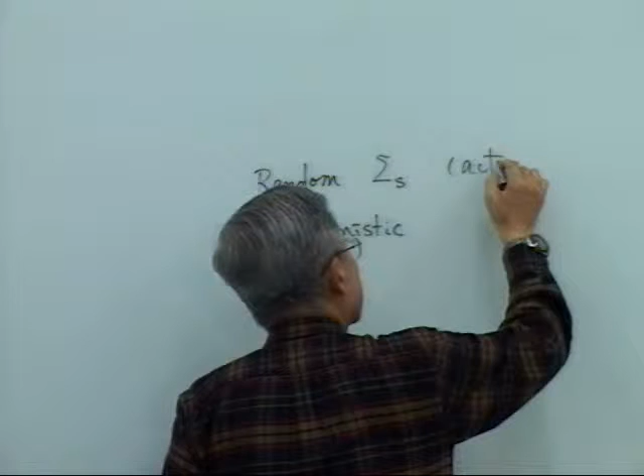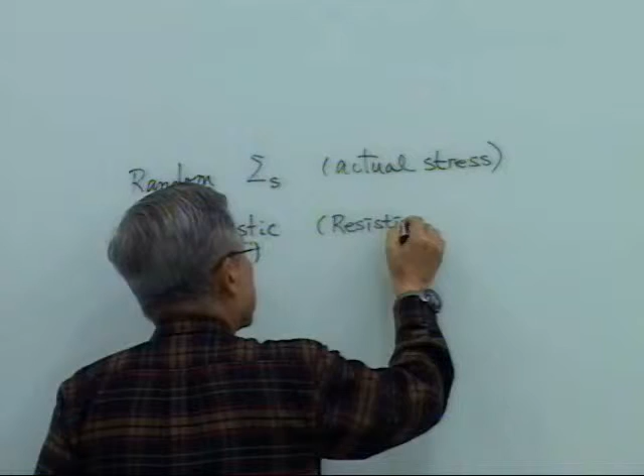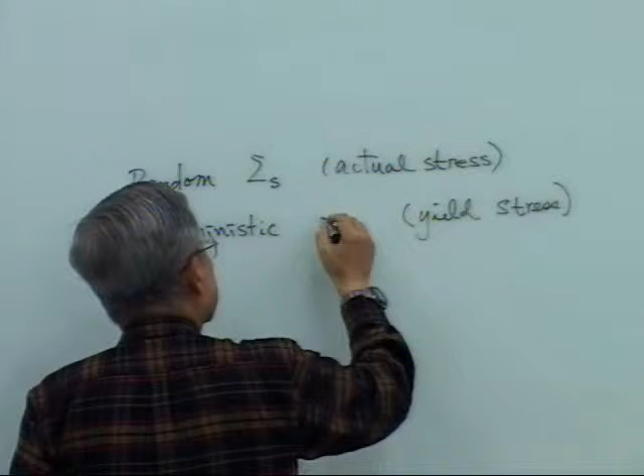So deterministic is we use yield. This is actual stress - unit has to be same. If you use input as a stress, output, let's say strength has to be in stresses. So this is the resisting - I use resisting, I use yield, right? Yield the stress. Yeah, so yield stress deterministic, so I use sigma y.

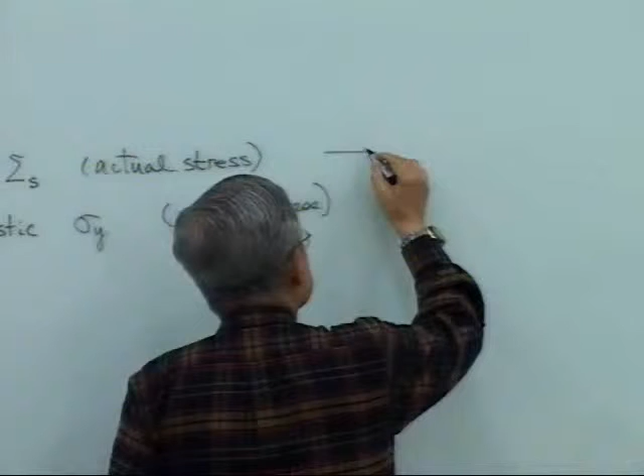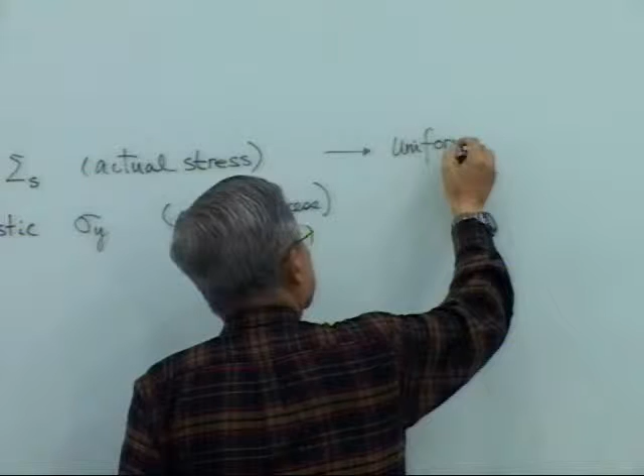So now first the thing we have to do is to get the reliability computation, then you have to cast into probabilistic. Then it's deterministic, this is random. The first case was uniform probability model.

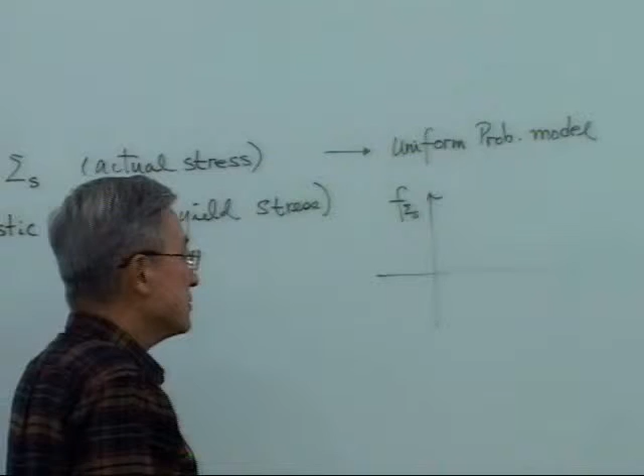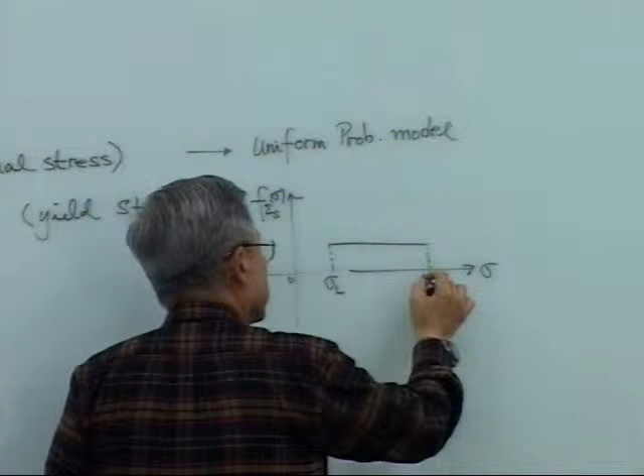So when you draw the function, fs, f sigma s, I use sigma, capital sigma as a random variable. So this could be sigma like this, sigma. Then the uniform probability density function is like this, right? Uniform probability density function. So I use, let's say, this is lower limit, this is upper limit.

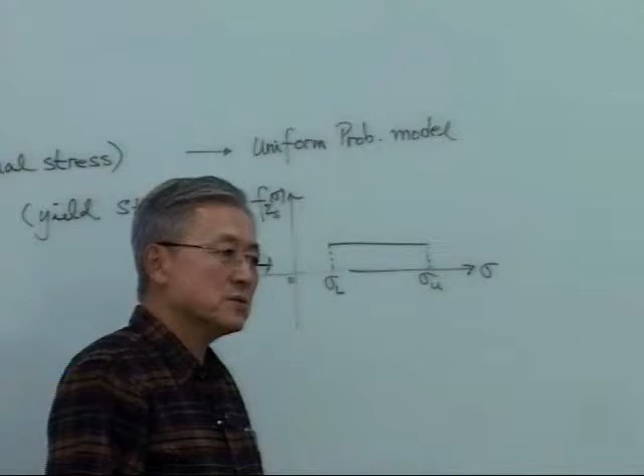This is kind of the simplest probability model used quite often. And this area has to be equal to 1. Then this height is supposed to be what? 1 over sigma u minus sigma L. That's what we did.

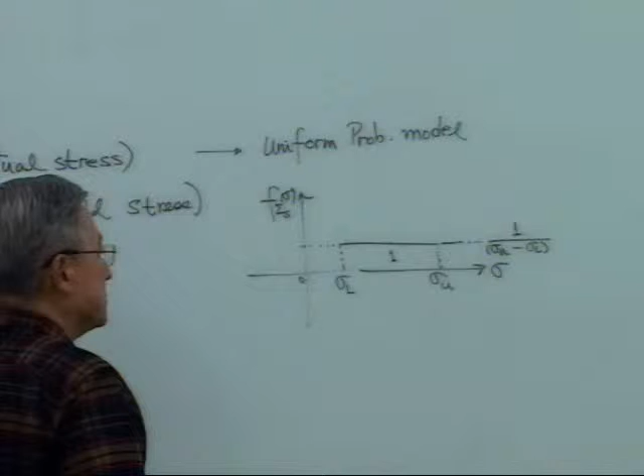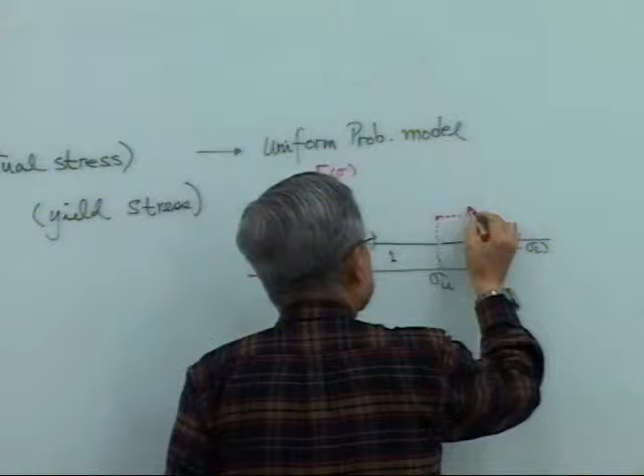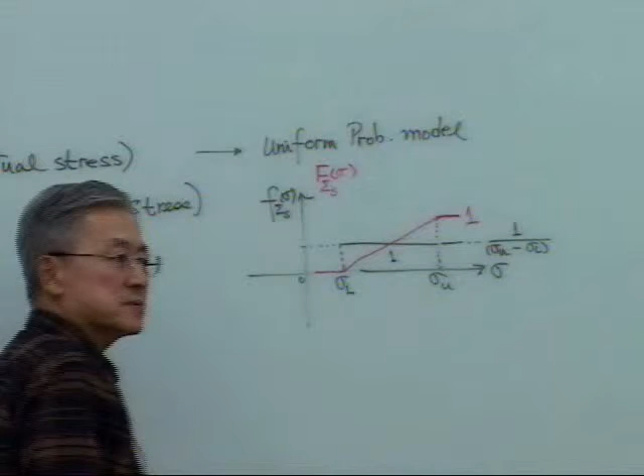And cumulative probability distribution function, or simply distribution function, let's say this is F sigma s. Before it gets to sigma L, of course, is 0. Then right here, cumulative value is equal to 1. Between is like this, right? So it's gonna be like that. That's what we have done - cumulative distribution function for the uniform situation.

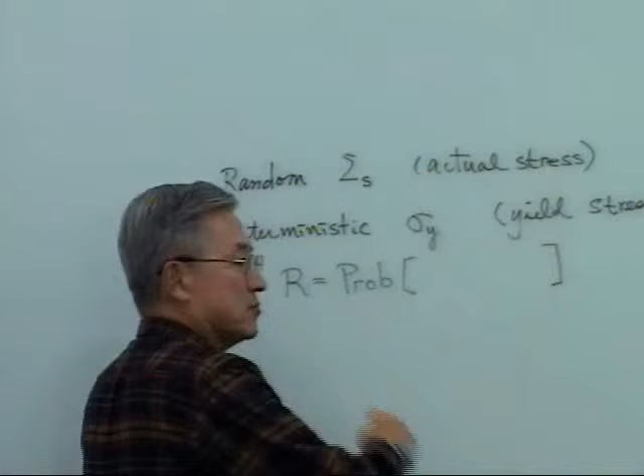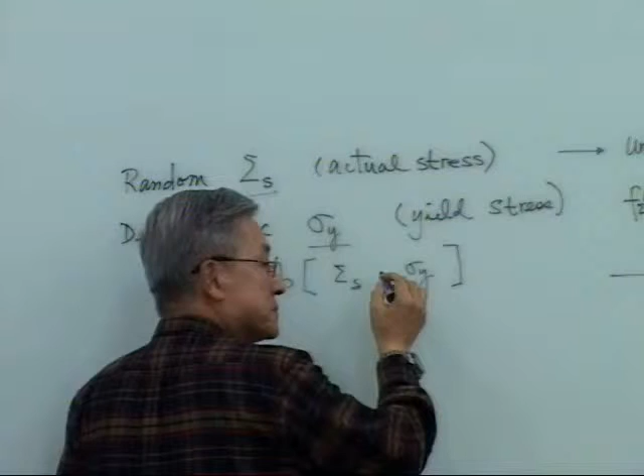So that's what we have done. So here, reliability is concerned, is probability. What is it? Probability - the reliability is concerned, and in this case it's a structural reliability, is probability such that the actual stress is less than or equal to the yield stress, sigma s, sigma y.

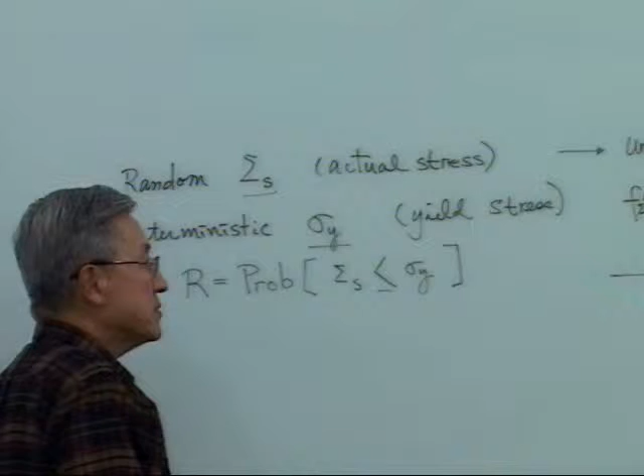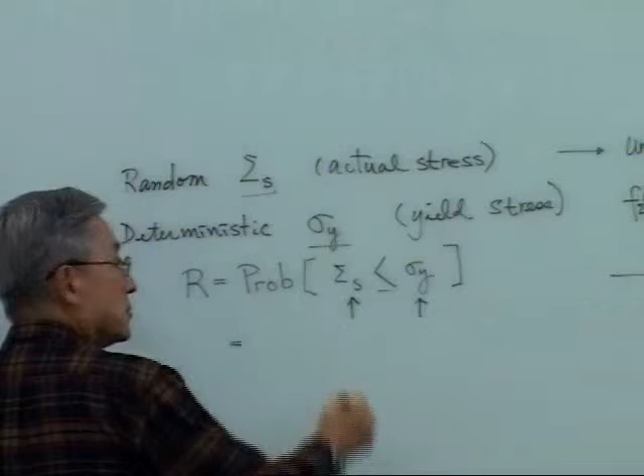And this is deterministic, and this is random. We use capital letter, right? So that's the situation, so we have a model here for this. And sigma y, yield stress is concerned, is deterministic, meaning you have only one single value, right? So if I cast into the cumulative distribution function, it's going to be simply - we have done this, but I quickly review.

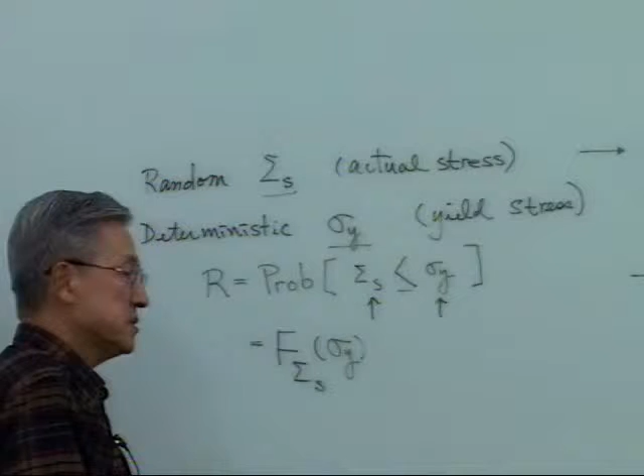This is S, and sigma y. So for when you have a deterministic resisting strength, or in this case we use as yield stress, it's much simpler of course.

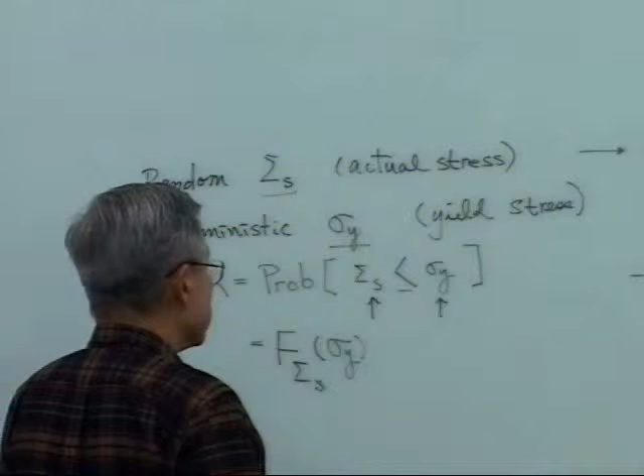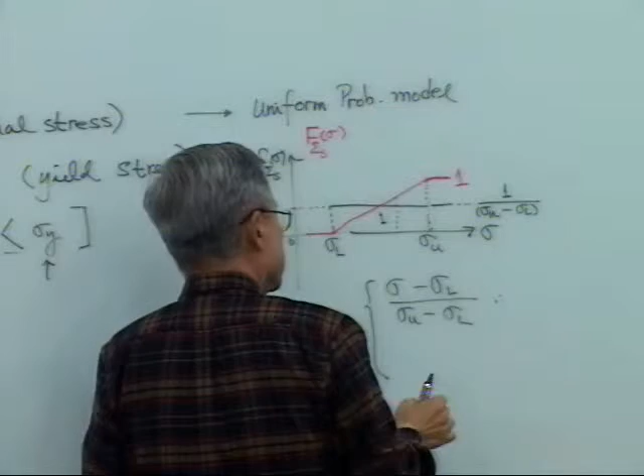So this is kind of a reliability here. So first the model in general, I can say F, exactly shown here. So I can say this equation here is simply sigma u minus sigma L, and sigma, any value here is a sigma, and sigma L. In this case, beyond the sigma u, below the sigma L is meaningless. Everything is zero. For the probability density function concerned, up is 1, down 0.

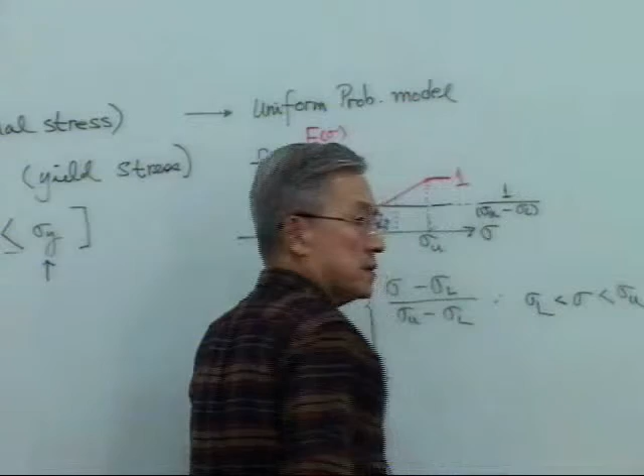So here I can say sigma L, range is very clear between the range, and below that, all otherwise region is all equal to - oh I'm sorry, in this case it's not the probability density function. So it's 0 if sigma is less than or equal to sigma L.

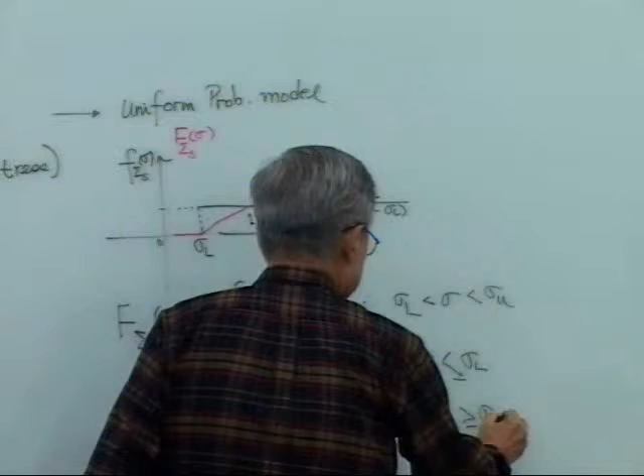Other case: when sigma is larger than sigma u, then you can cast from this simple model. In this case, if this is a y, then this guy is a y, so this is a valid zone.

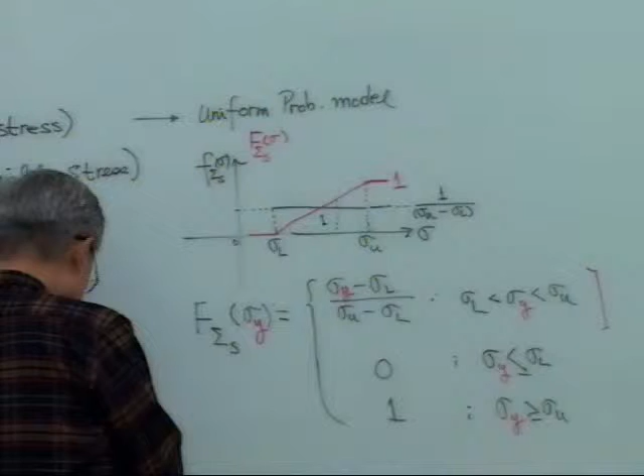Sigma y, this is sigma y, things like that. That's what we have done last week, Wednesday last week. Deterministic, the yield stresses. The mean, the couple parameters, probabilistic parameters, is important. In this case, it's like a mean and standard deviation.

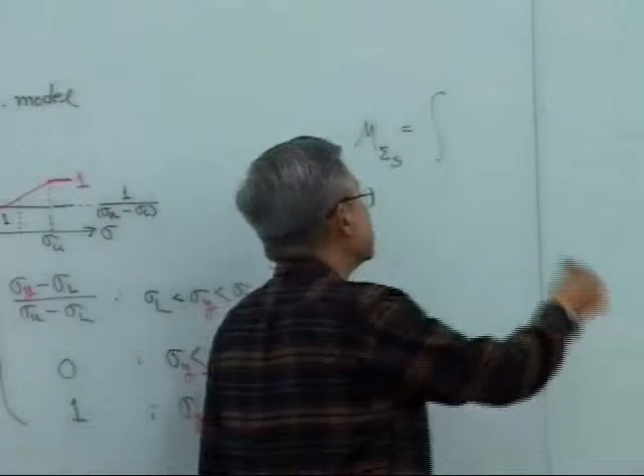So mean and standard deviation, sigma s, is equal to, in the equation form... what's the equation form for this? What's the limit? Minus infinity? Louder. S? What's this here, S? Because this is an integration parameter, so you can just use S or T, whatever.

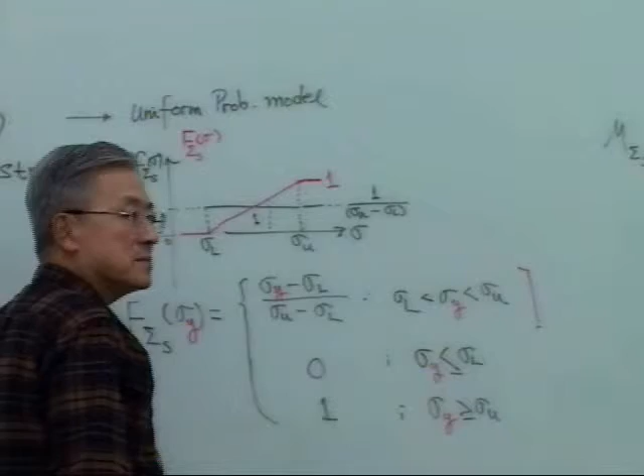But here, this usually, in this situation, what do you have? Anybody? Minus infinity. In this model here, you intend... you want... this should really be sigma L, right? What would this be?

Where is that equation, 1 over sigma u minus sigma L, right? That's about it, straight integration, right? So if you do that, then you have one half sigma u plus this.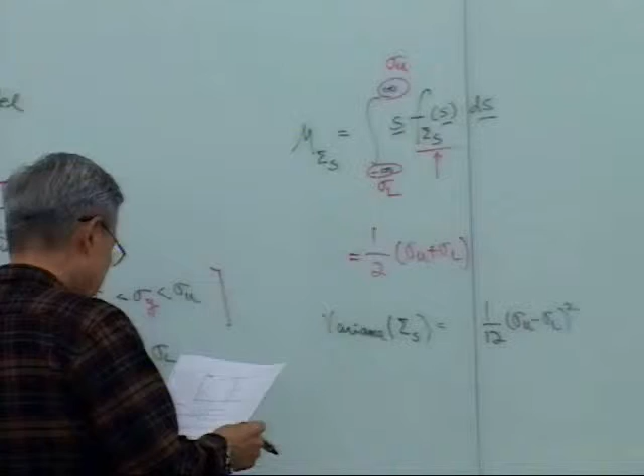And sigma, believe it or not, try to derive all this. It's rather simple: sigma u minus sigma L, you can get the variance of sigma s straight from here. And you can express sigma L using these relations.

Sigma S. All this notation is clear to you, right? And sigma, you derive this yourself. Shouldn't take more than something like 15 to 30 minutes, everything here.

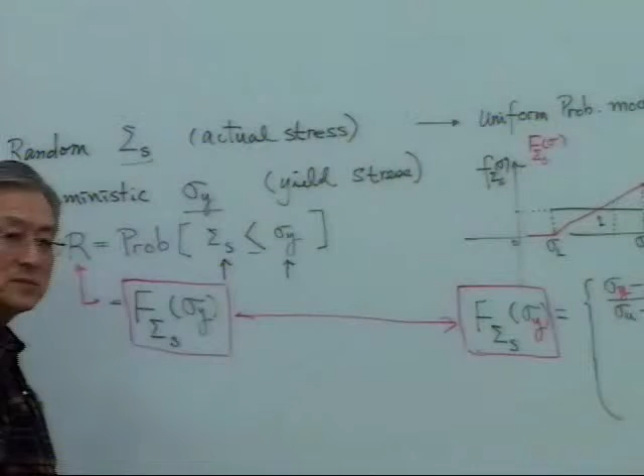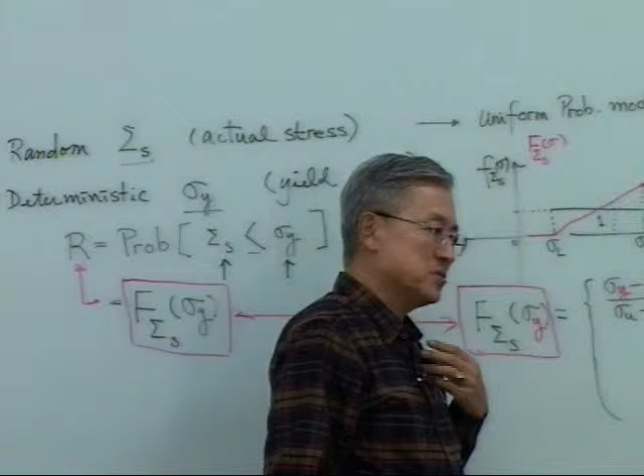So yes, this is reliability, right? Structural reliability for this particular situation. R is deterministic, very, very good quality materials, whether it's steel or aluminum whatsoever. Aluminum usually doesn't have a yield stress.

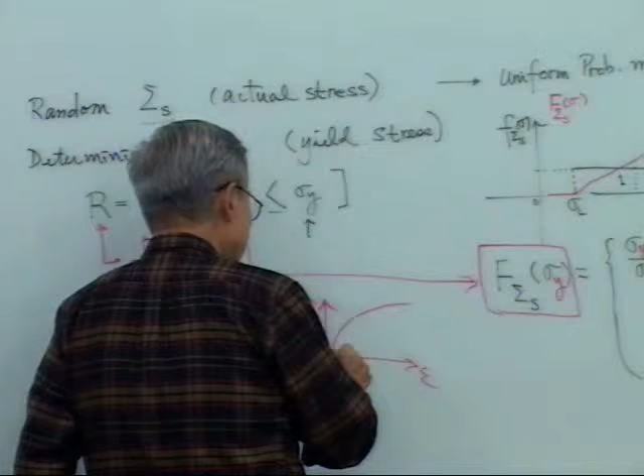As I mentioned, aluminum doesn't have a yield, it just goes like this and breaks off. But steel straight up has a yield stress, a yield point.

R is sigma y. This is a deterministic value, sigma y, yield stress is deterministic, it's a single point, minus mu sigma s, plus 3 times the variance of sigma s, 2 times 3, variance.

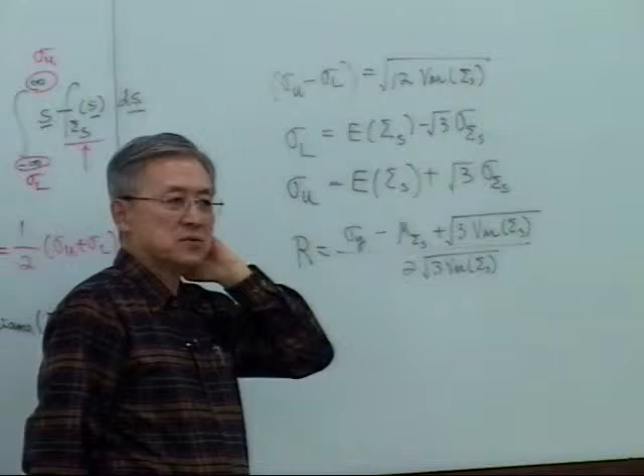The beauty of these two parameters, the load and resistance model, is that it has a closed form solution. As I recall, all of them have closed form solutions. Maybe some in the downstream random situation, maybe not, but very nice forms.

And the nu sigma s, what does nu stand for? Who cares? Shingyu... nu, is it called nu, what do you call this? This is nu, what do you... oh, you're great, yeah. Coefficient of variation, right? Coefficient of variation is a measure of what?

What does sigma over mean signify? It normalizes the dispersion, the uncertainty. In this case, the input is really the actual stress.

You have to be careful here. I'm sometimes confused because I want to follow Isaac's notation, so sigma, if I write this, does it make sense? They use variance, the square root of the variance, that's what Isaac uses, because the square root of the variance is sigma, the standard deviation.

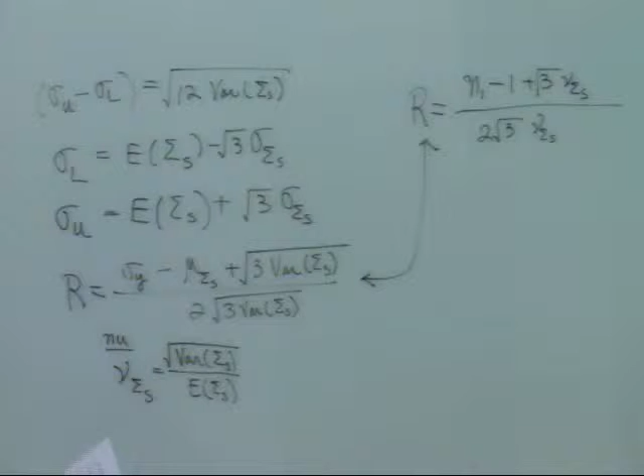Then this guy is the same as that, this is 1, vice versa. You can have the equation equivalent. This is really the same. You can compute the reliability. So over here is really relation. This is reliability, and this is a safety factor.

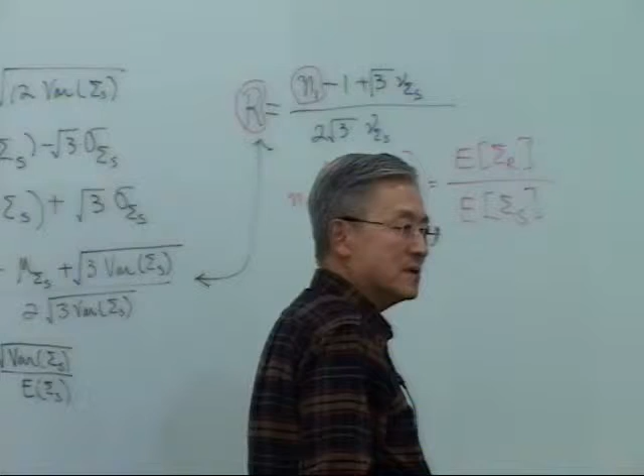The safety factor N1 is a central safety factor, which is equal to what's over what? Just remember R over S would be easy. Simply resistance over the stress. This is what, but it's central. Central means E of R over E of S.

This is equal to, for this case, sigma, don't confuse it, this is yield stress, over mu S. Because resistance is one number, a single value.

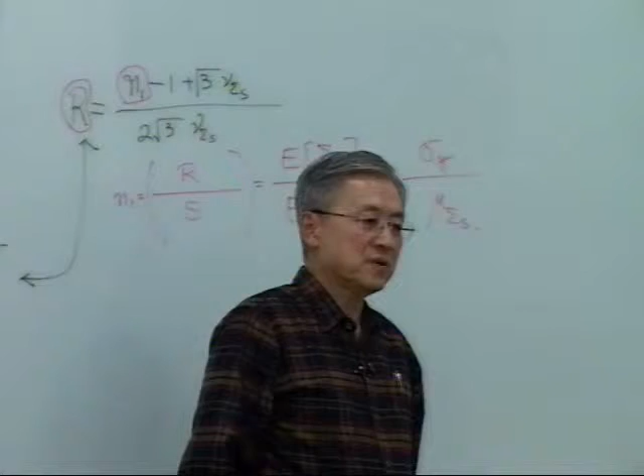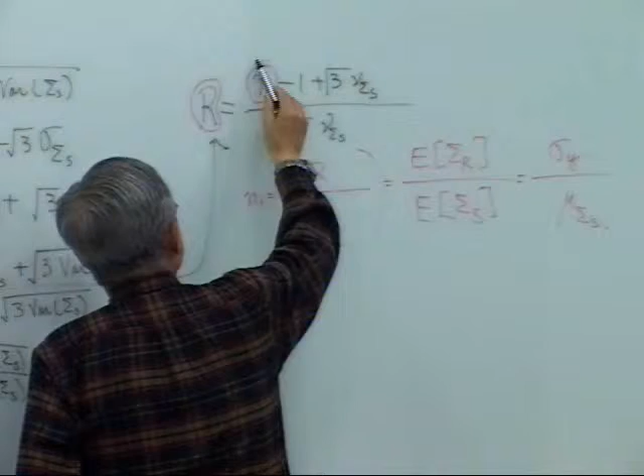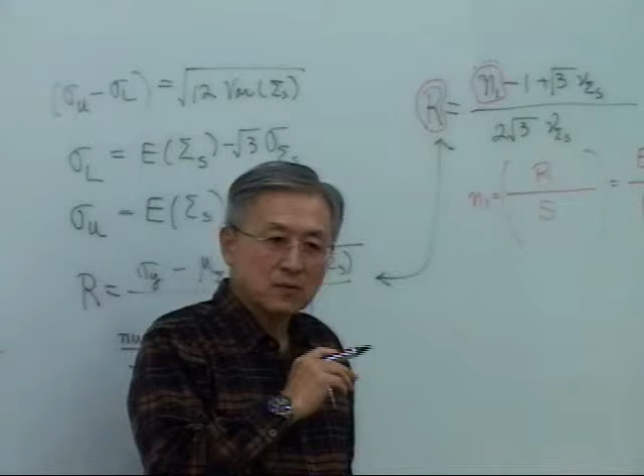This N1, remember, is the central safety factor. It's a ratio of the mean. So when in the usual ship construction manual or building construction manual they talk about N1, you can convert it into the reliability of the system. The corresponding probability model here is a uniform probability model for the actual stresses. So you can rewrite N1 is equal to...

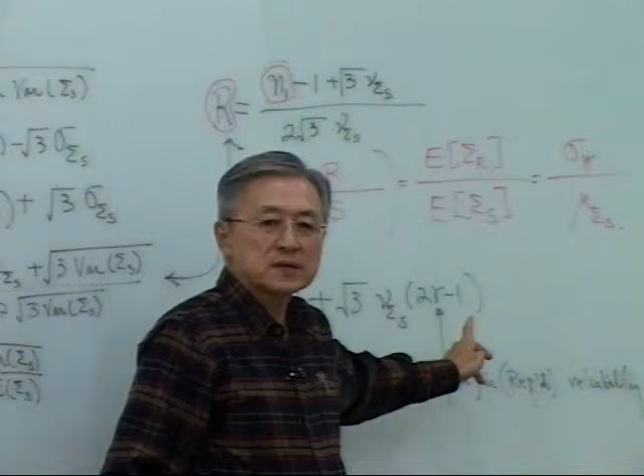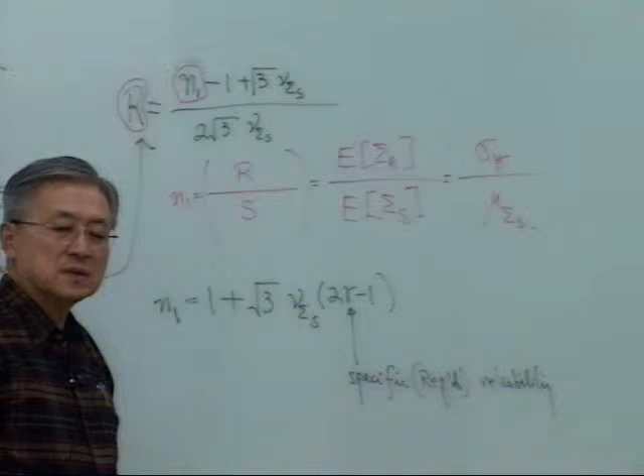This R here, I use small r rather than capital R in this relation, is really the specific or required reliability. In other words, let's say 0.9999, that's the required reliability. Then what kind of safety factor does it require? So it's a straight relation, N1, the central safety factor, versus the reliability of the system.

This is rather simple.

I hate to say exam, but usually I ask what kind of problem you're going to give us, very comprehensive questions. For example, actual stress is random.

And random, but follows, let's say, normal distribution. And the yield stress is, let's say, deterministic. Then find the expression for the reliability. So you can derive it simply, just following the basic theory.

And case 2, we're going to look at sigma s, of course, as random, following an exponential function, a very useful probability function. Exponential, the probability model.

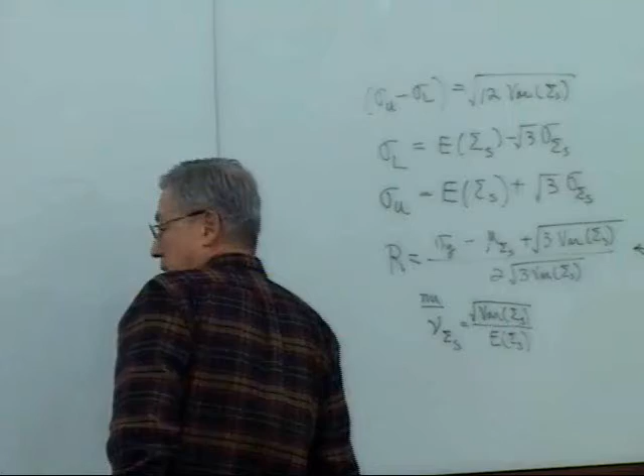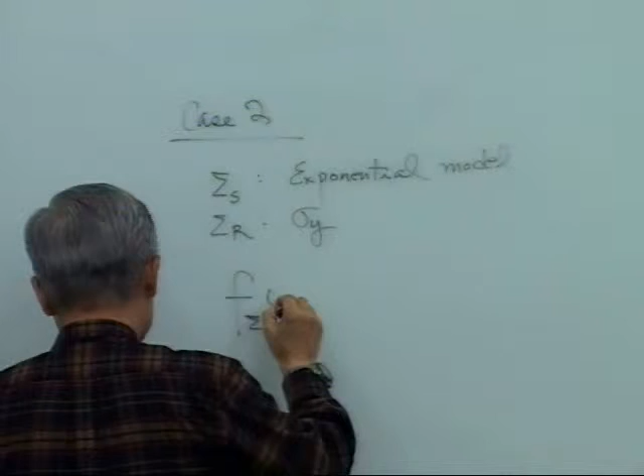And of course sigma r is deterministic, sigma y. For the exponential model, F sigma s, we deal with the stress. Usual notation you are using, stresses are sigma, that's the reason I use sigma to represent stresses.

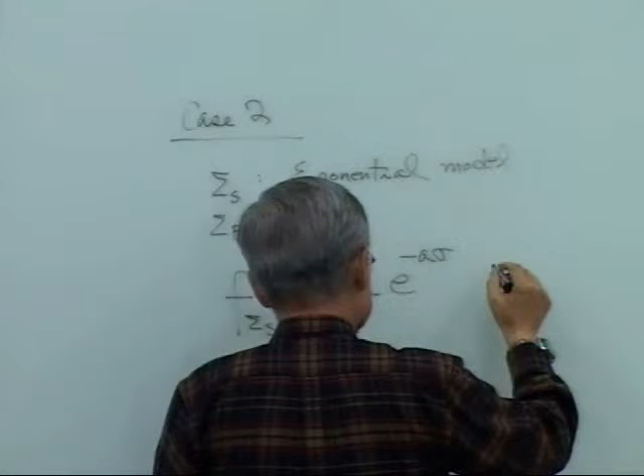This is equal to a times e to the minus a sigma, for sigma greater or equal to 0.

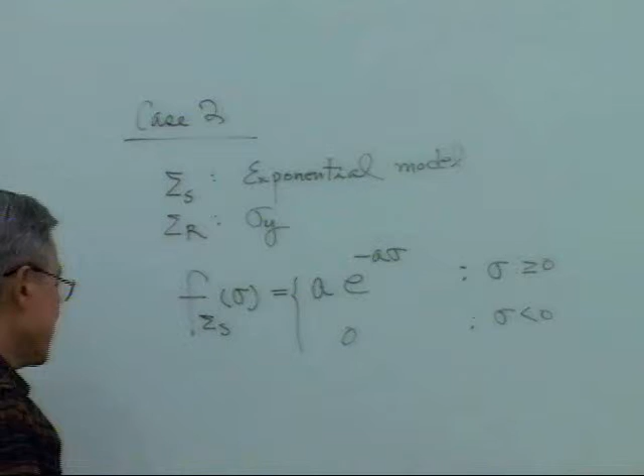In the previous chapter section, I used a different notation. I used lambda rather than a, or sometimes 1 over theta as a, but that's immaterial, now people just use the parameters. So otherwise, when sigma is less than 0, then the probability density function is equal to 0.

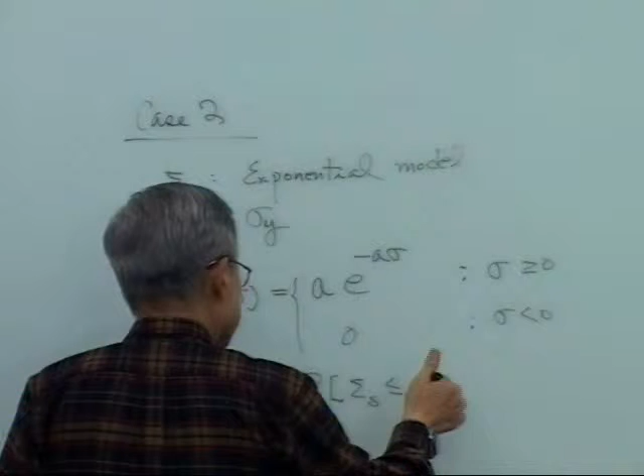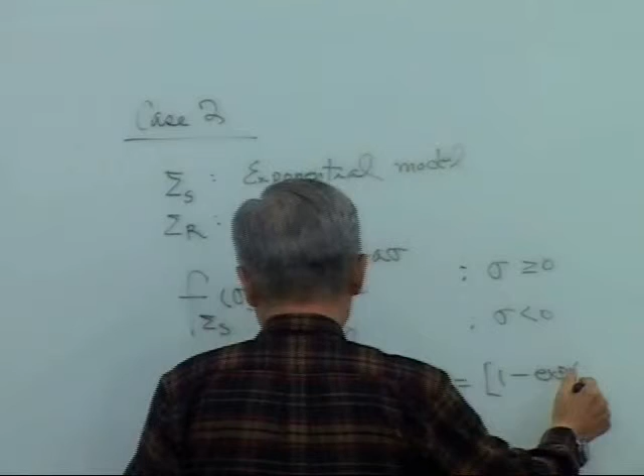So then again, the distribution functions you can just integrate to get this. So probability sigma s less than or equal to sigma is equal to 1 minus the exponential function minus a sigma.

But over here it just adds the capital U. Capital U is a step function such that sigma, this is U, is like this - this is 0, and this is value of 1.

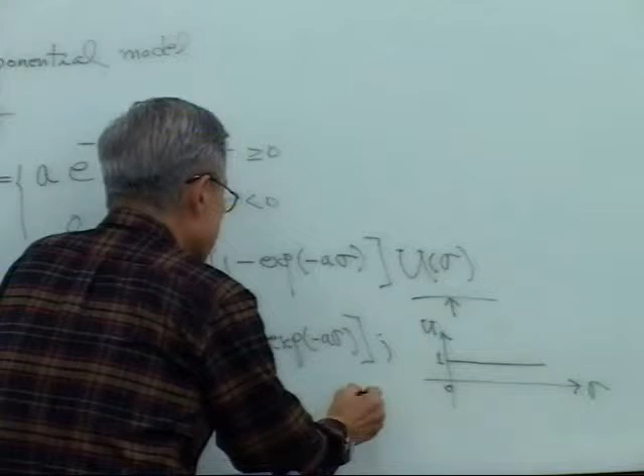Below 0 is 0. So by putting this, this is always that value when sigma is greater than or equal to 0. This is really the same as saying 1 minus exp minus a sigma, then saying sigma is greater or equal to 0, identical format. U is a step function. Got it? You can just use this rather than this, there's no difference at all.

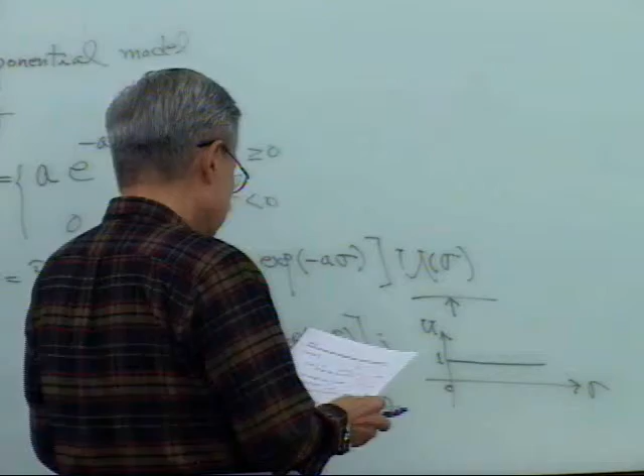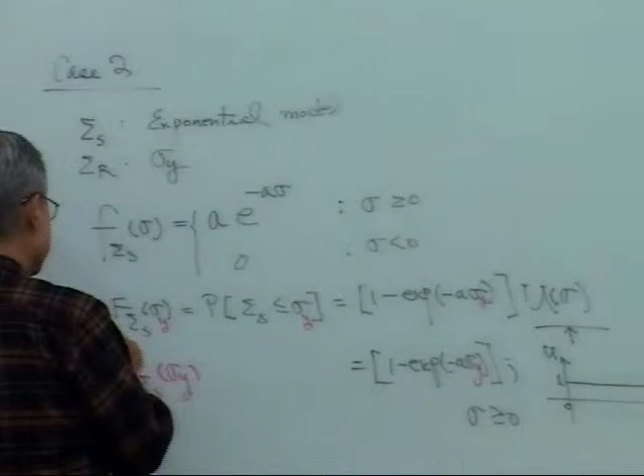So when you do this, then of course when you change this - if I just put this guy as R, in this special case, is F sigma S correct? Correct or not? Correct. Which means over here I can just switch it. If you put Y here, then I can put Y there, and sigma Y there, vice versa, then R - you can rewrite it in identical format.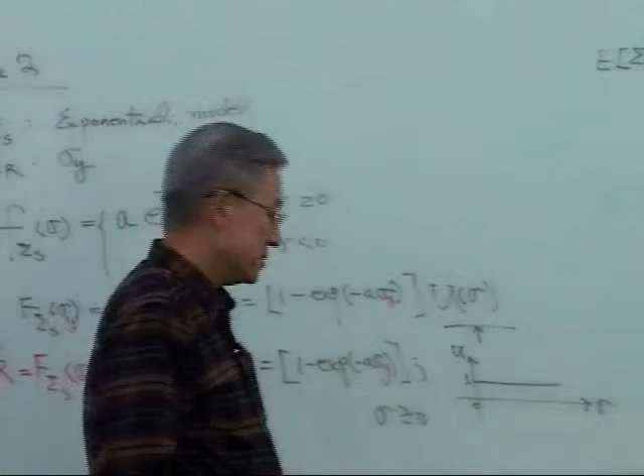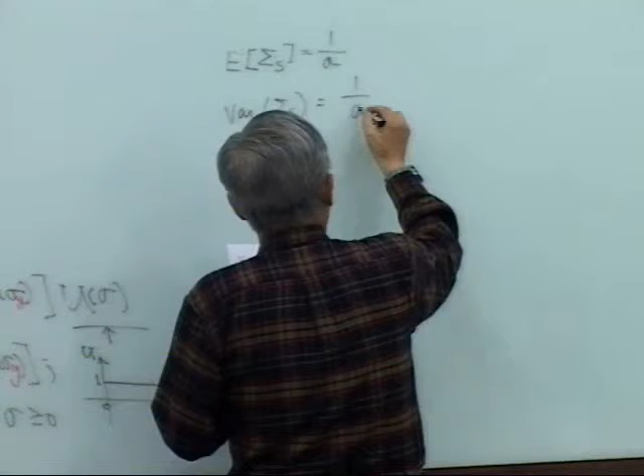So the important parameter, mean of sigma s, is 1 over a. You can derive it. And the variance of sigma s - standard deviation squared - is equal to 1 over a squared. Then you can derive that. And the coefficient of variation of sigma s is equal to 1 over a, over 1 over a, which is equal to 1. Everything has to be there.

Reliability expression for deterministic yield stress is rather simple: R equals 1 minus exp minus a times sigma y times U of sigma y. This is about all for the exponential distribution.

Or you can express this by changing—this is deterministic. Over here, A is equal to 1 over E of sigma s. Replace this by this. You can write this as 1 minus exp minus n1 u sigma. Yeah, this is not right.

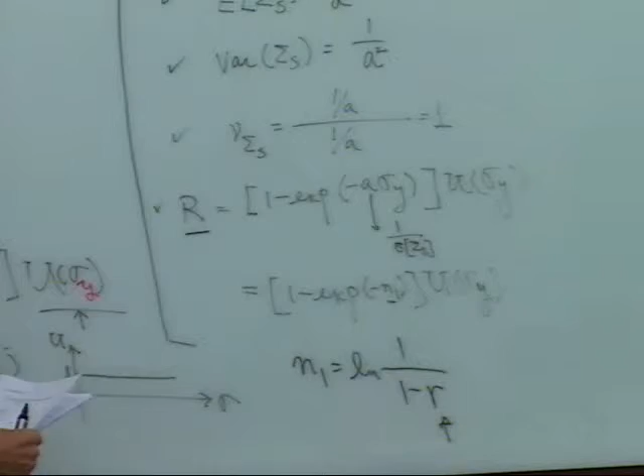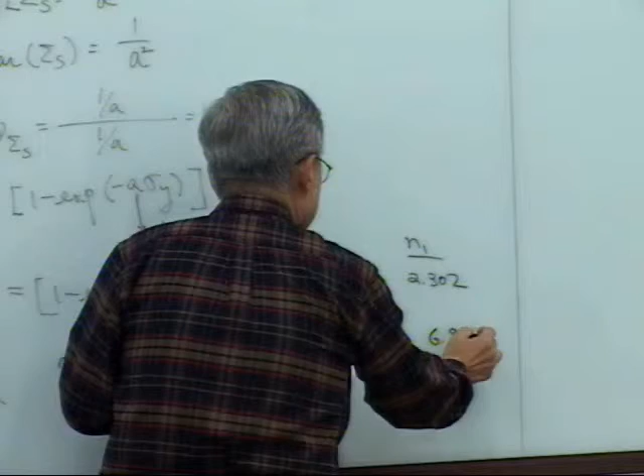Then you can compute here, for example, for an R value required or specific, what's the central safety factor? For R value to get a reliability of 0.9, this is 2.302. To get 0.999 reliability, then the central safety factor has to be almost 7.

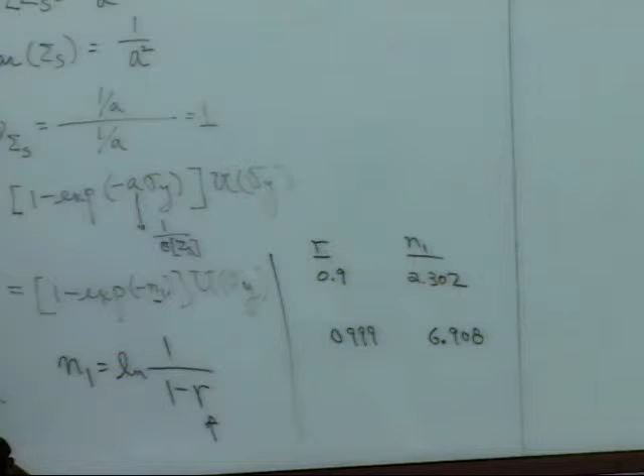Extremely high—I have never seen a safety factor of 7. For nuclear reactor design, I remember it's around 3, factor of safety is about 3. But to get 99.9% reliability of the system, the equivalent safety factor is 7. That's amazingly high.

So what you have to be careful about is that the probability model is very important. The probability model, exponential, goes like this. So that relates directly.

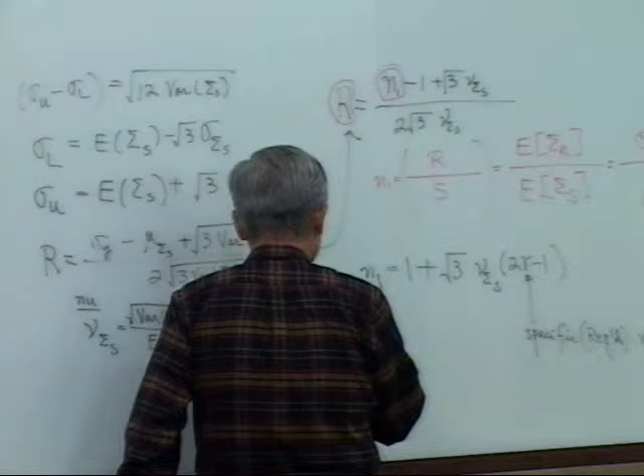Okay, for reliability for the uniform distribution, I don't have it tabulated. You can use the tabulated N1 versus R values—0.9, 0.99, 0.999—then what would the value be? I don't have that number, but it goes like this, you can compare for that.

Is it getting a pattern for R deterministic? You can just use the probability distribution function for the actual stress as is, then switch the sigma in that model by sigma y. You're all set to compute the reliability, strictly speaking. And another probability model which is popular for structural mechanics, probabilistic mechanics, is the Rayleigh distribution.

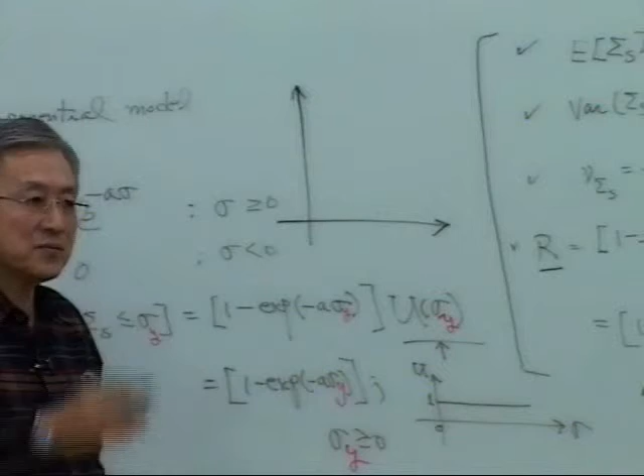Rayleigh distribution—what's the shape of the Rayleigh distribution? You have done some projects also. What's the shape? Is it like a normal distribution? It has a skew in there, right? It has a skew in the probability distribution, something like this for the Rayleigh.

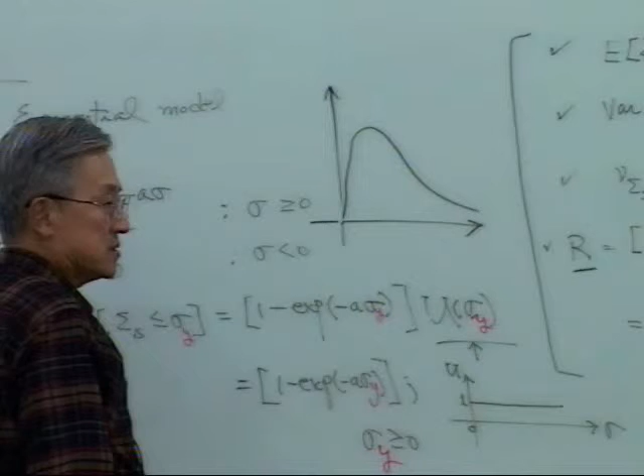Some of you use Rayleigh in your project, and it's used quite a bit in probabilistic structural mechanics or dynamics, and I'm going to do that right now, a few minutes. Then Wednesday I'm going to do normal and log normal. I like log normal because it has all kinds of skewness, negative skew, positive skew, and a very elegant expression. You can recast the log normal into the normal when you take a natural log, and there's flexibility there. So we're gonna do that this week sometime.

Okay, Rayleigh distribution. We start with this probability density model. For the deterministic R, deterministic R means it's really one single value of yield stress. If you have this, after that, if you generate this, then you can generate R. That's the procedure, very easy in these situations.

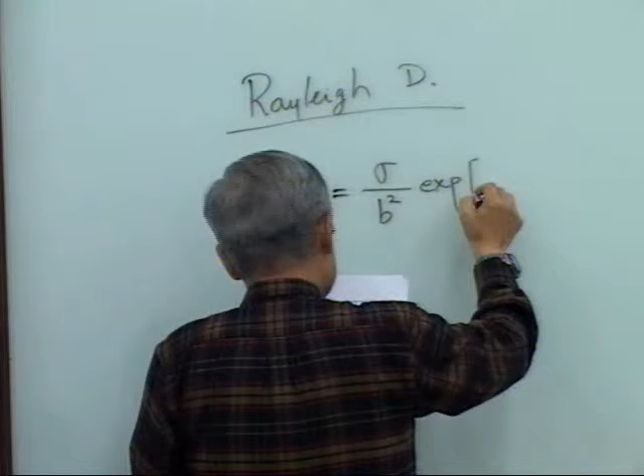So this is equal to—again this is Isaac's notation he happened to use, but in the previous section I used a different variable, though it really doesn't matter. I use x rather than sigma. In this case sigma has to be greater or equal to 0, otherwise it's 0.

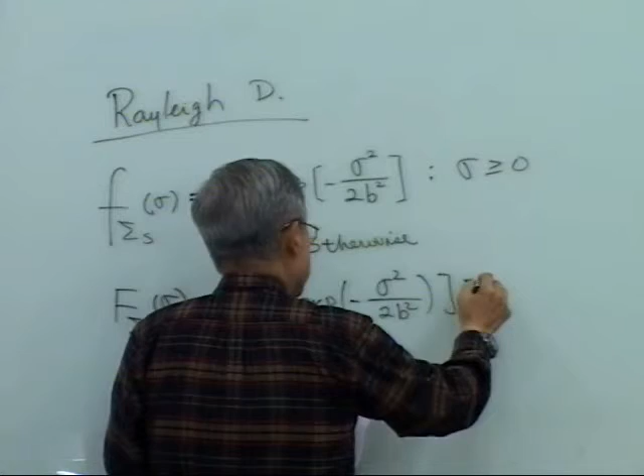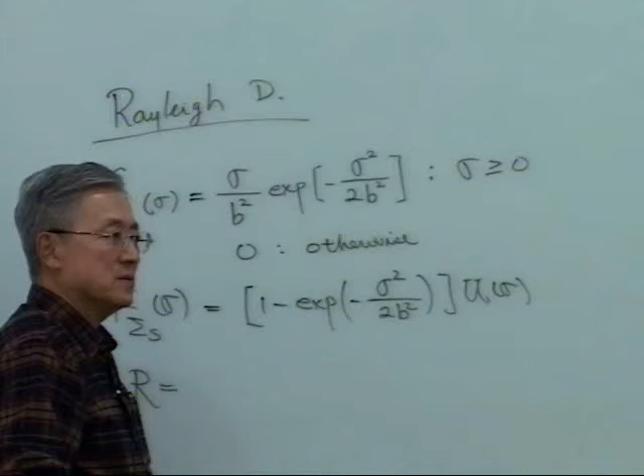Then for the cumulative distribution function, I want you to, if you have time, derive this. But if you look at Isaac's book, of course any book has a slight error in there. When we find the error, I usually ask Higyu, he's my teaching assistant, to confirm it, to doubly make sure it's correct. There is some error, but minor.

So here, the reliability is concerned—here is sigma s, sigma y. So it's readily available for this case only. So replace from here, readily available, replace sigma by sigma y. From here, you replace sigma by sigma y, then that goes right into it. Straight, very straightforward.

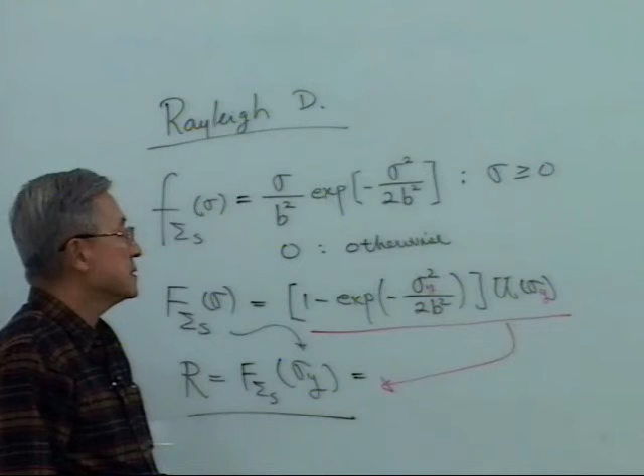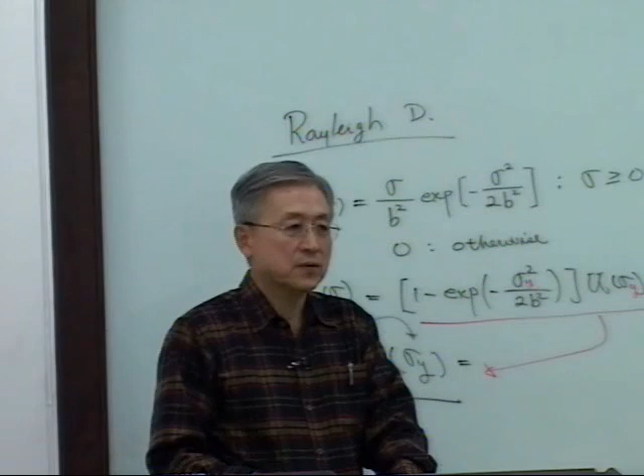All right, so I'll continue on Wednesday. I want to finish this deterministic yield on Wednesday. Then we can go into a different case on Friday. Okay.